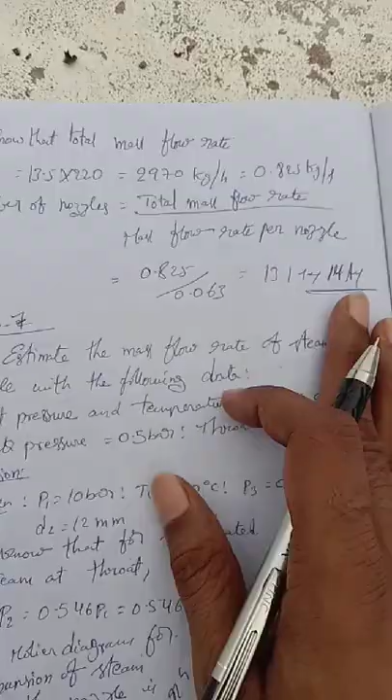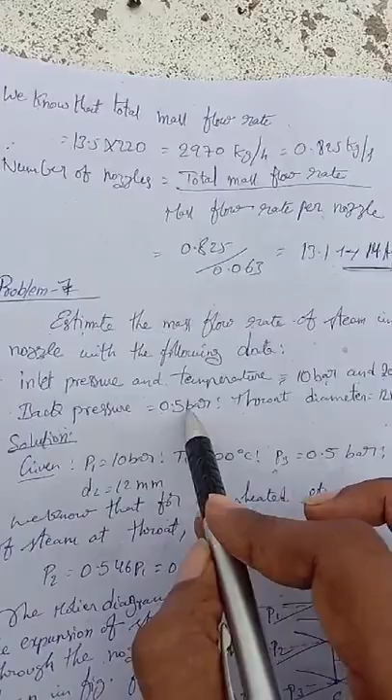We are going to continue with the next problem. Estimate the mass flow rate of steam in a nozzle with the following data. Inlet pressure and temperature are equal to 10 bar and 200 degrees Celsius. Back pressure is equal to 0.5 bar. Throat diameter is equal to 12 mm. So we are going to estimate the mass flow rate M. So now we are going to solve this problem.

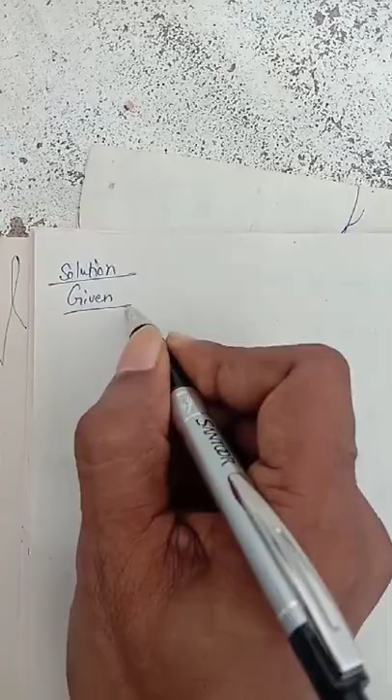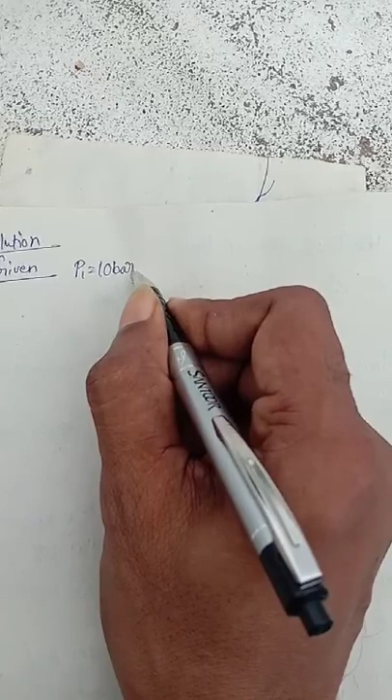Solution: given. So now what is the given data? You can write down here. P1 is equal to 10 bar. T1 is equal to 200 degrees Celsius. P3 is equal to 0.5 bar. And D2 is equal to 12 mm.

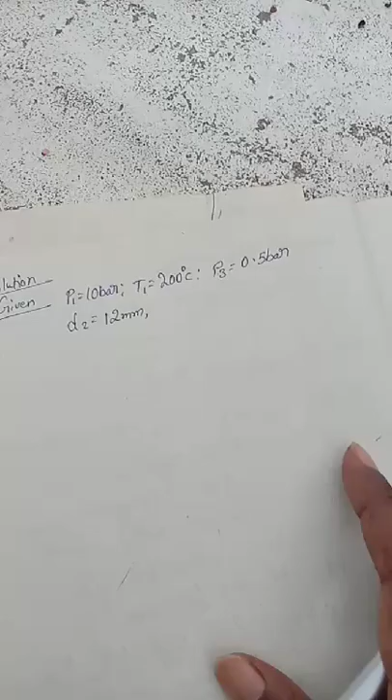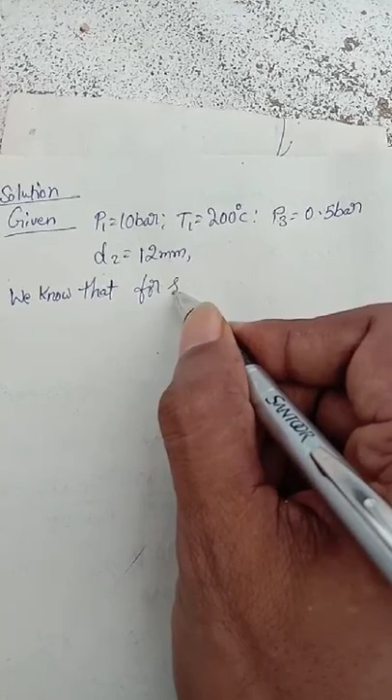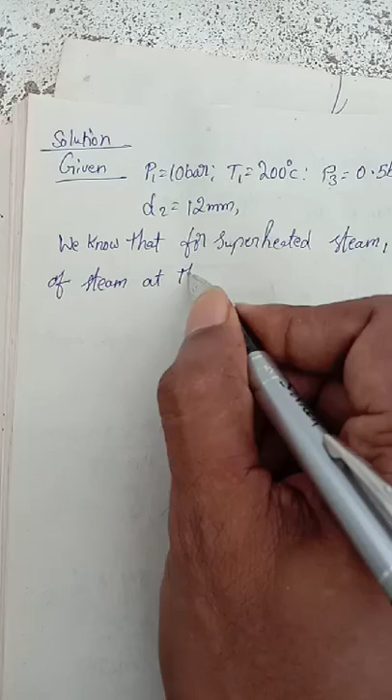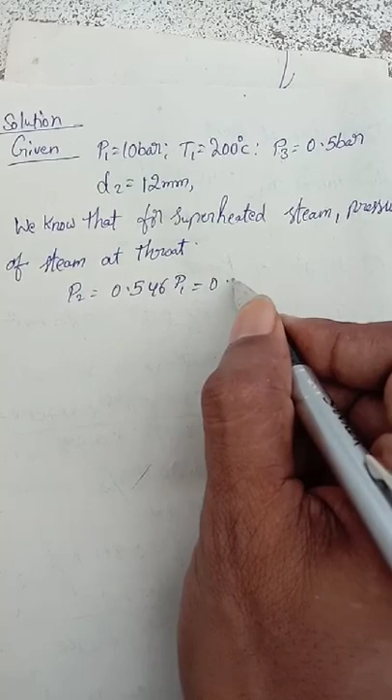Now we know that for superheated steam, pressure of steam at throat, P2 is equal to 0.546 P1. So 0.546 into P1, which is 10. Then you can write down here 5.46 bar.

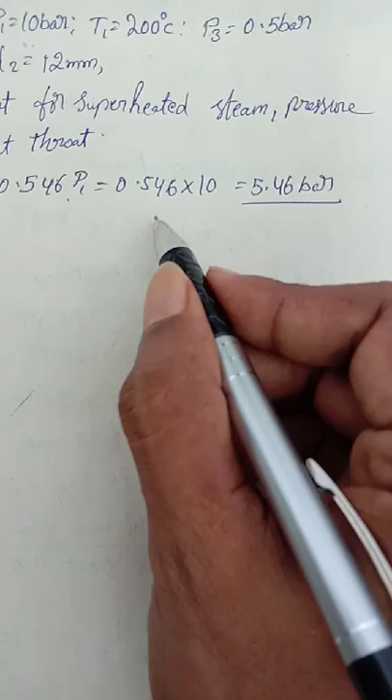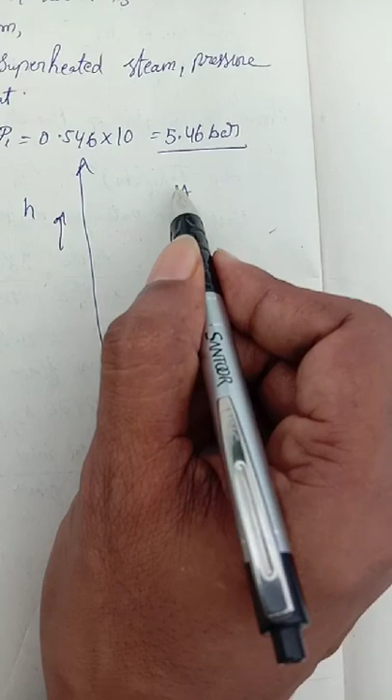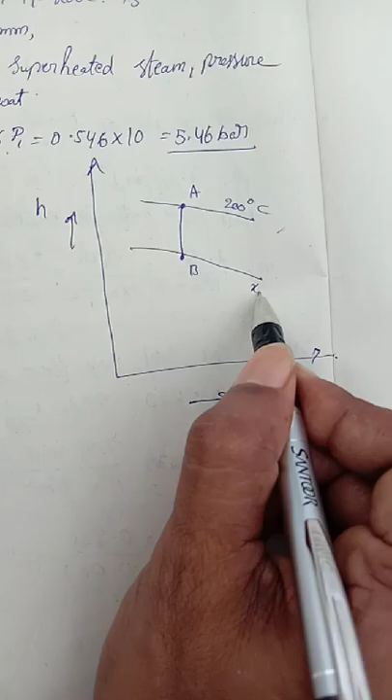Now we are going to draw here the Mollier chart. This axis is H, and this is S, entropy. Now the point is representing A. The point here is representing B. Then here also the temperature is going downwards like this. And this is for x2. You can write down here 0.982. This is taken from steam tables.

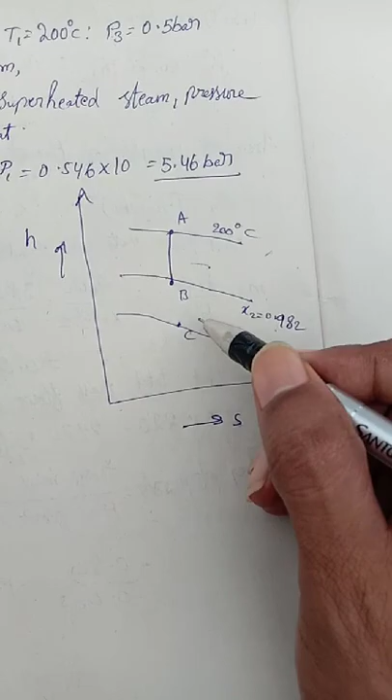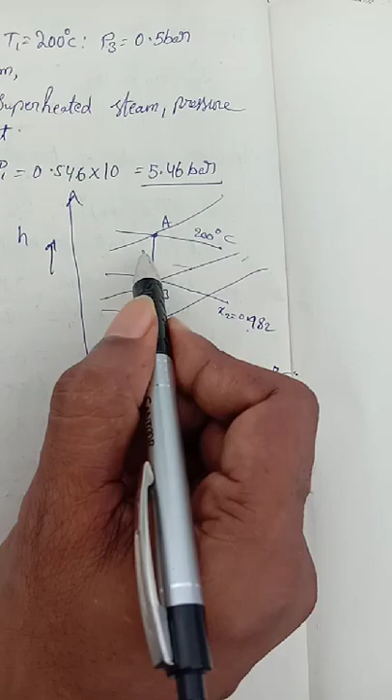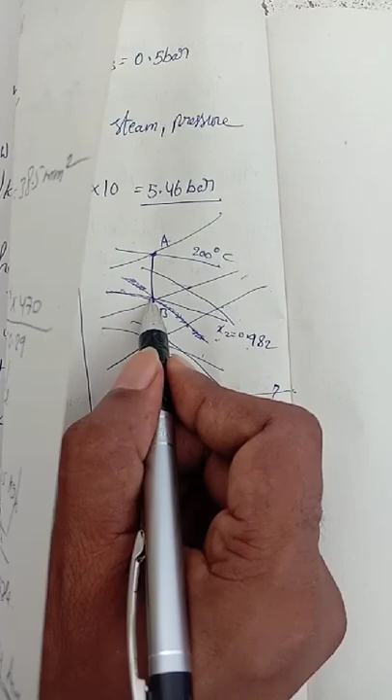Next we go for point C, exit. The exit is also going like this. Now the pressure lines. Now the saturation line, and this is also going like this. Already x2 is there, so we don't need to draw this line here. This is the saturation line.

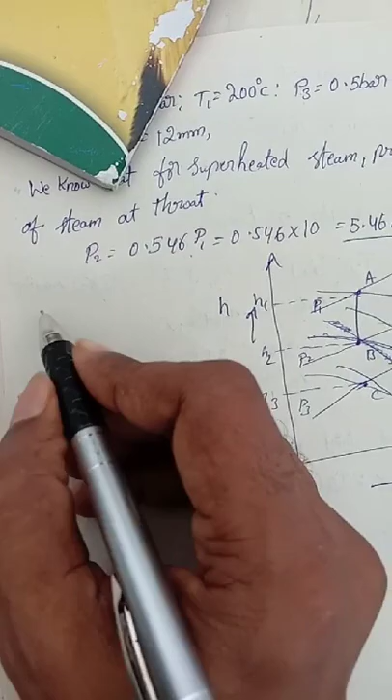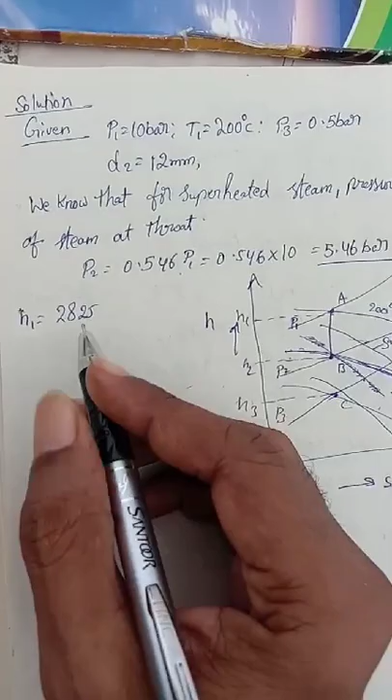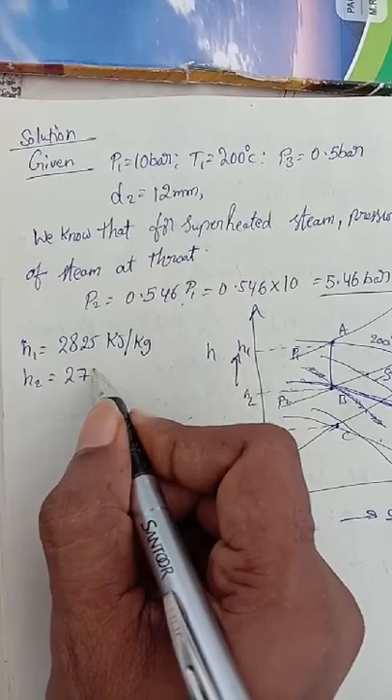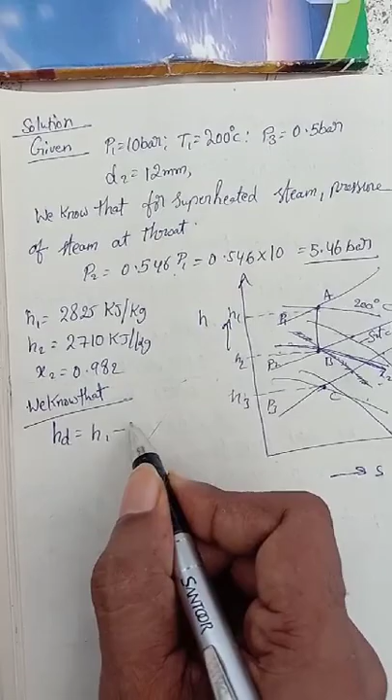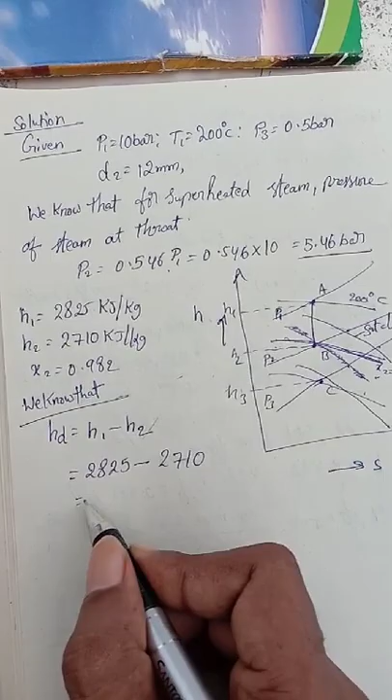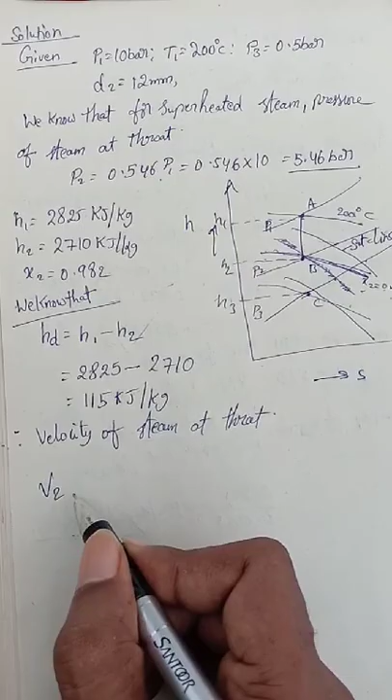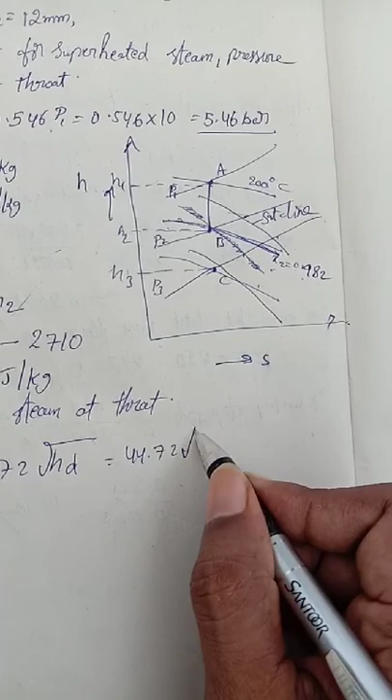We know that heat drop HD is equal to H1 minus H2. Calculate this and we'll get the heat drop. Therefore, velocity of steam at throat is equal to, you know very well this equation. Now substitute the values here, calculate this, and we'll get the answer.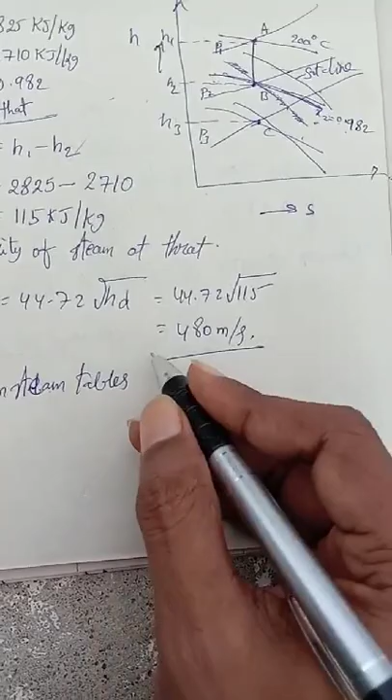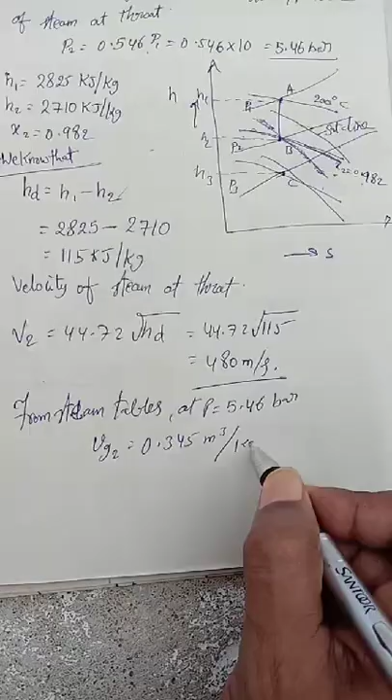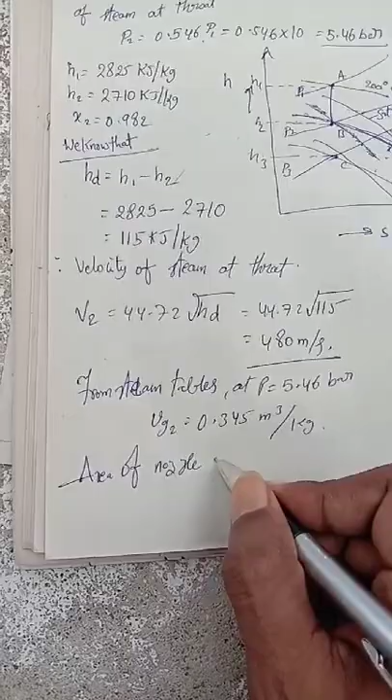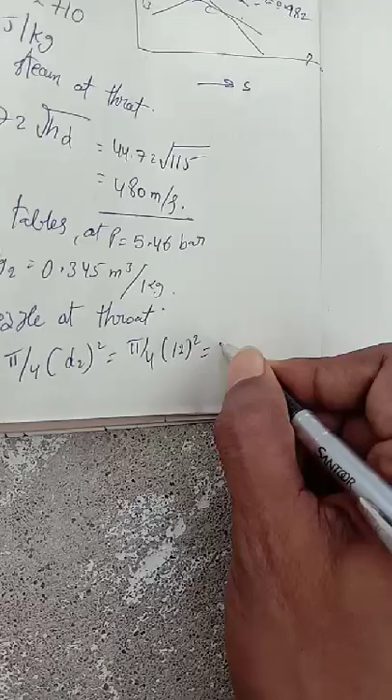Next, from steam tables, at pressure P equal to 5.46 bar, we find the specific volume at throat Vg2 is equal to 0.345 meter cube per kg. Now we find the area of the nozzle at throat. A2 is equal to pi by 4 d2 whole square. d is given, so solve this and we get the area. Converted into meters, 113 into 10 to the power of minus 6 meters square.

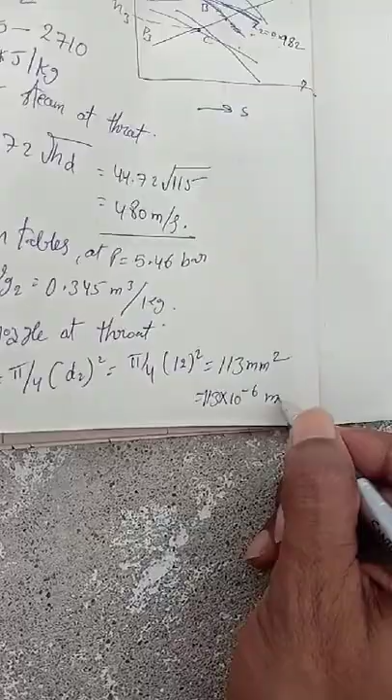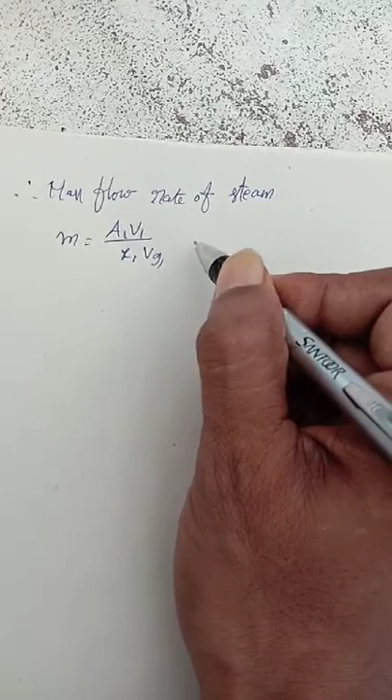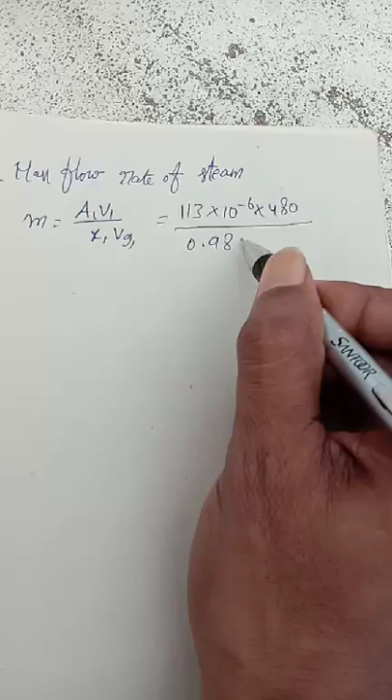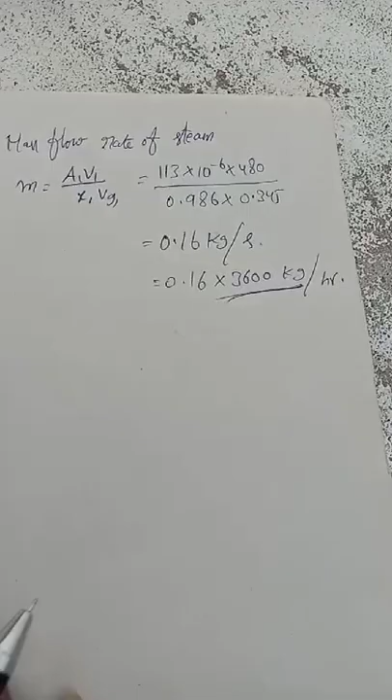Therefore, mass flow rate of steam, M is equal to A2 V2 divided by X2 Vg2, that is equal to 113 into 10 to the power of minus 6 into 480 divided by 0.986 into 0.345. Then solve this in kg per second. To convert into kg per hour, multiply by 3600. So this is the solution for this problem, to find the mass flow rate.

And next we go for another problem.

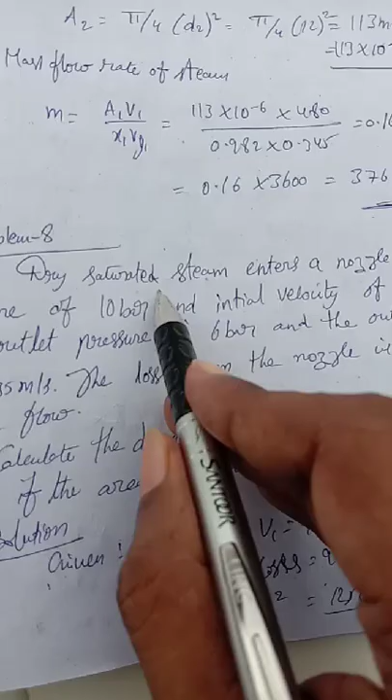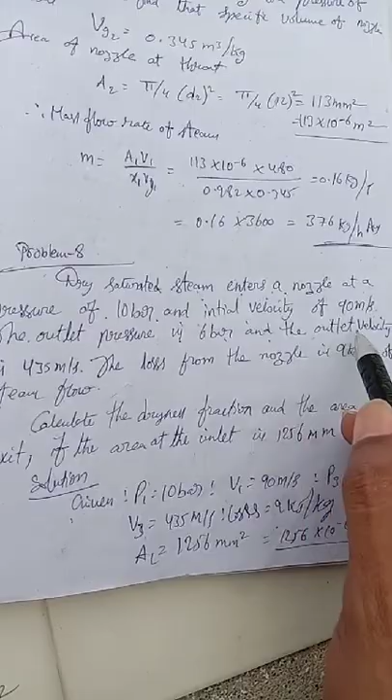Dry saturated steam enters a nozzle at a pressure of 10 bar and initial velocity of 90 meters per second. The outlet pressure is 6 bar and the outlet velocity is 435 meters per second. The losses from the nozzle are 9 kilojoules per kg of steam flow. Calculate the dryness fraction and the area of the exit if the area at the inlet is

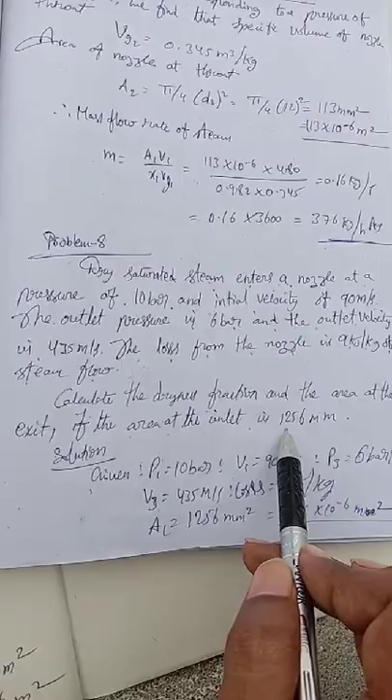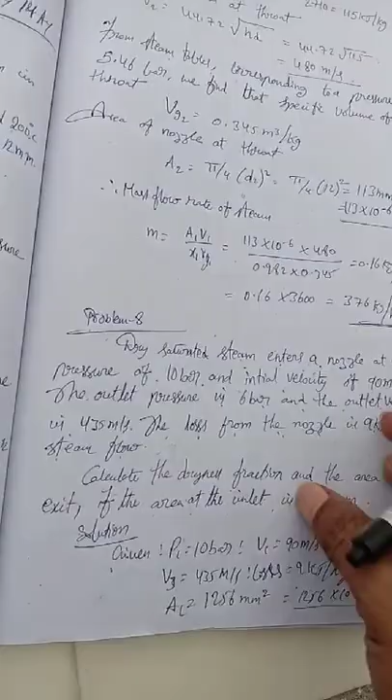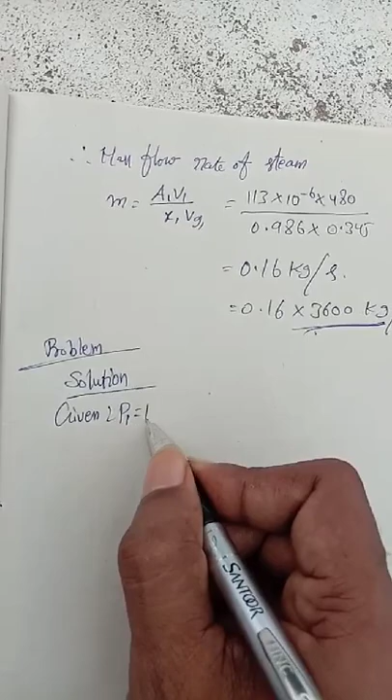So this is how the problem is here. We will see how to solve this one. Solution. Given, you can write down first the given. Here P1 is equal to 10 bar, V1 is equal to 90 meters per second.

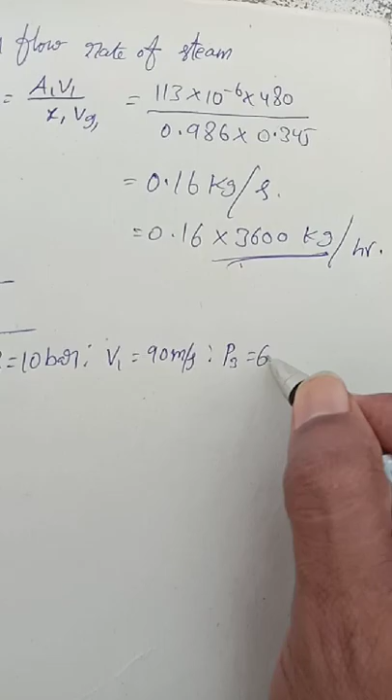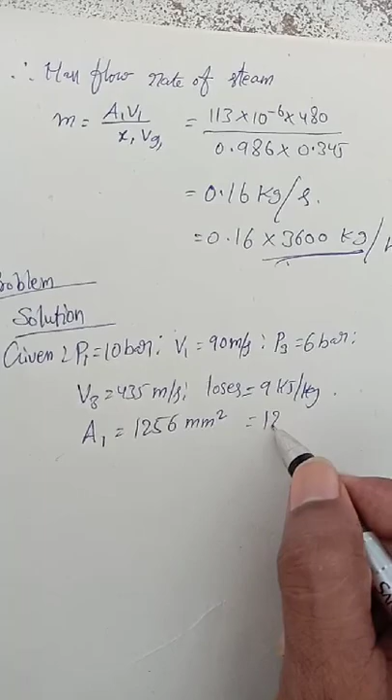P3 is equal to 6 bar. V3 is equal to 435 meters per second. Losses are equal to 9 kilojoules per kg. A1 is equal to 1256 mm square, which you can write as 1256 into 10 to the power of minus 6 meter square. So this is the given in the problem.

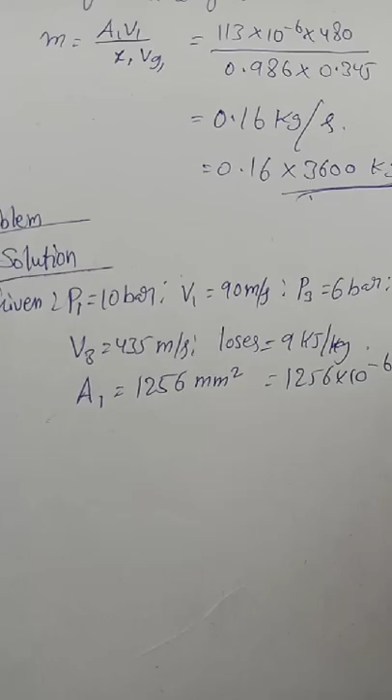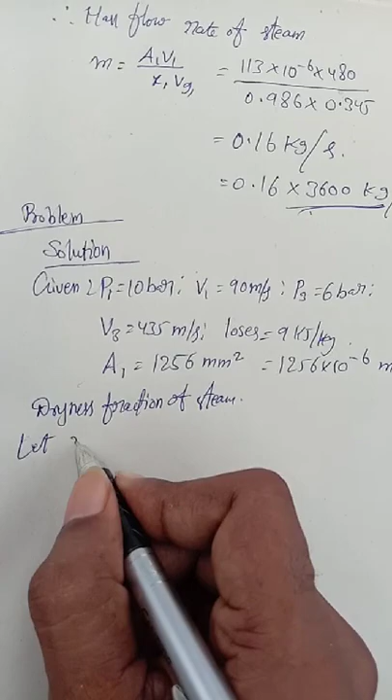Now we are going to find the dryness fraction of steam. So first, we find the dryness fraction of steam. Let x3 be the dryness fraction of steam at the exit. From steam tables,

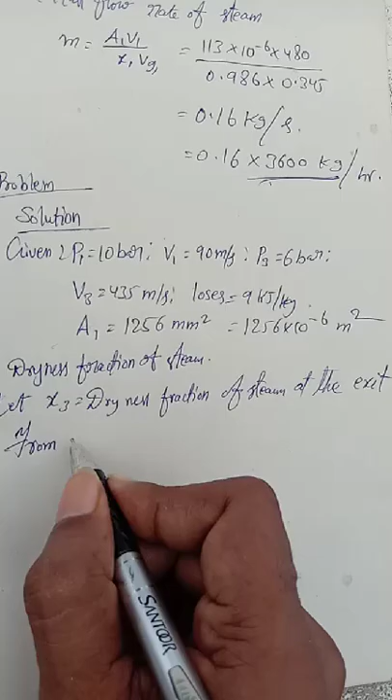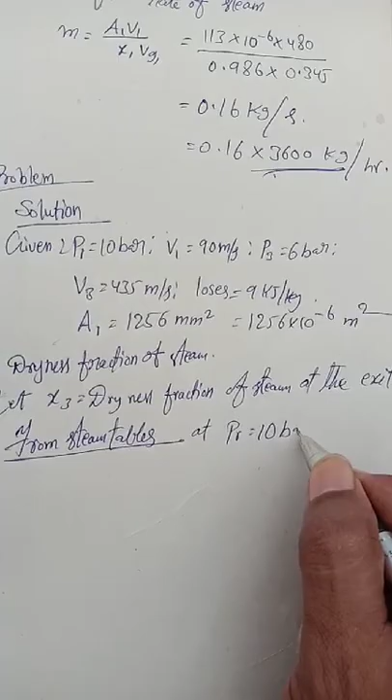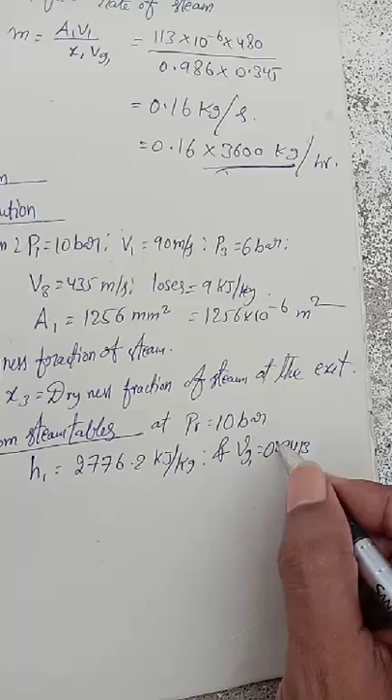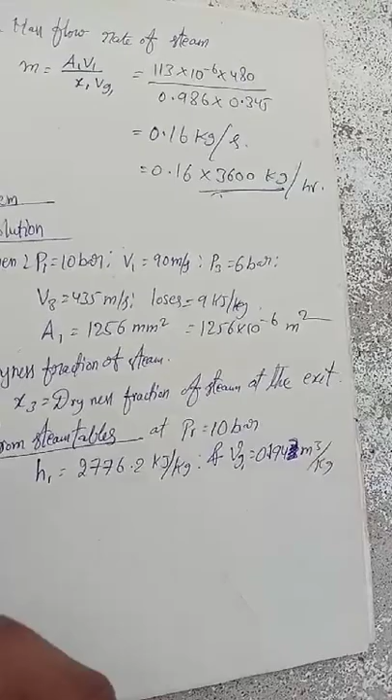at a pressure of 10 bar, we find the enthalpy of dry saturated steam, H1, and VG1 is equal to 0.1943 meter cube per kg. And corresponding to a pressure of 6 bar, at 6 bar we find

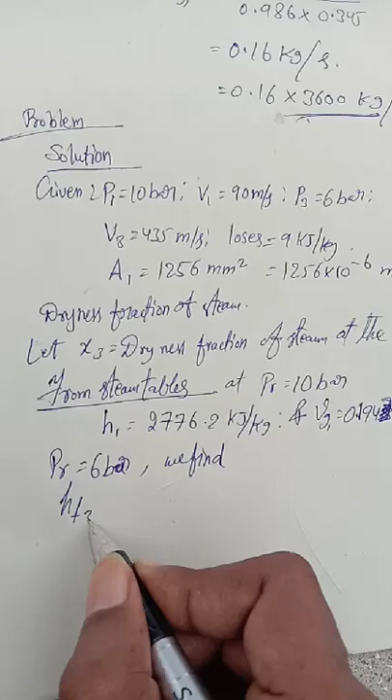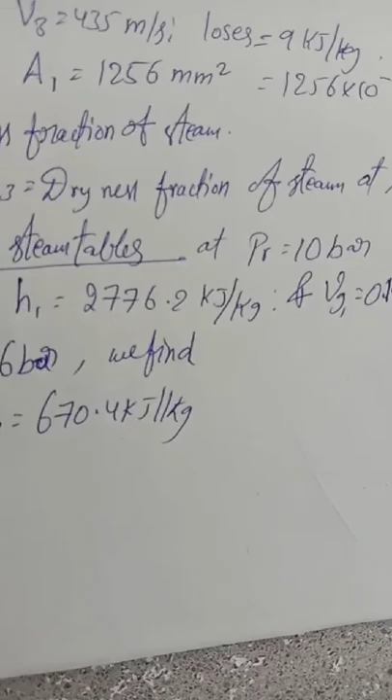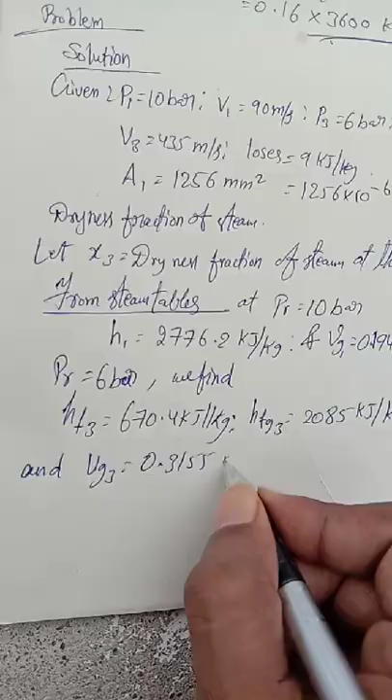HF3 is equal to 670 kilojoules per kg, HFG3 is equal to 2085 kilojoules per kg, and VG3 is equal to 0.3155 meter cube per kg.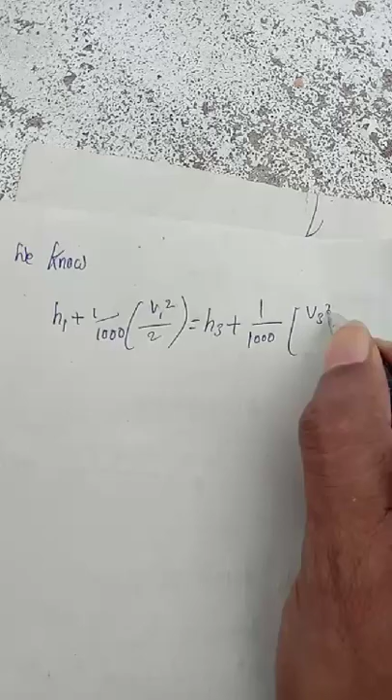Now we know that for a steady flow through the nozzle, H1 plus 1 by 1000 V1 squared by 2 is equal to H3 plus 1 by 1000 V3 squared by 2 plus losses. This is the steady flow equation

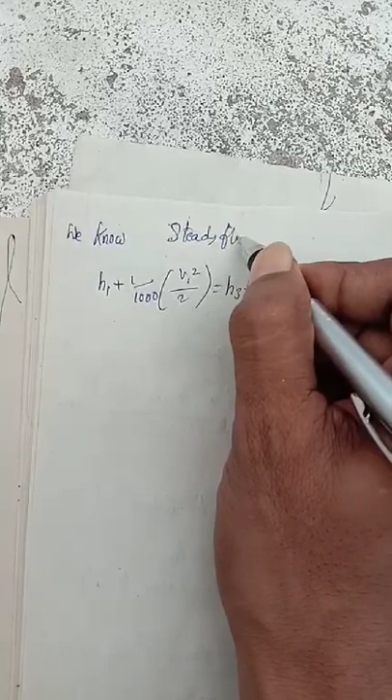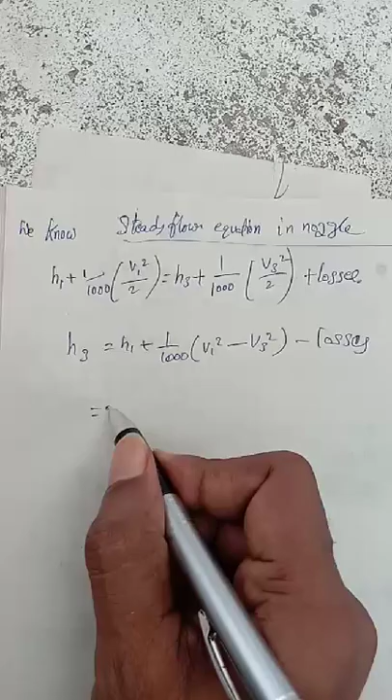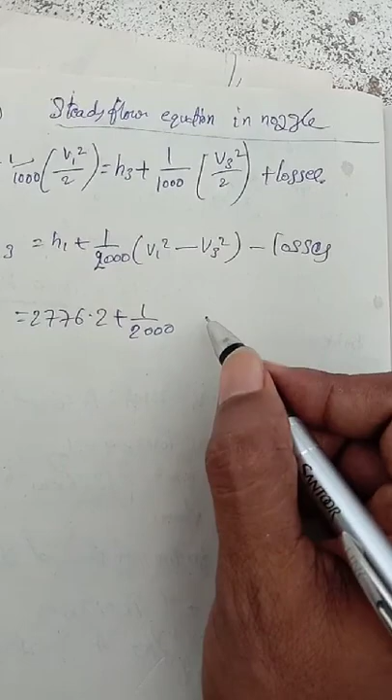in a nozzle. So then H3 is equal to H1 plus 1 by 2000 into V1 square minus V3 square, minus losses. Then substitute the values. This is 2000, I think. Minus 9, losses is given. So 2776.2 minus 99.6. Calculate this and we'll get the answer in kilojoules per kg.

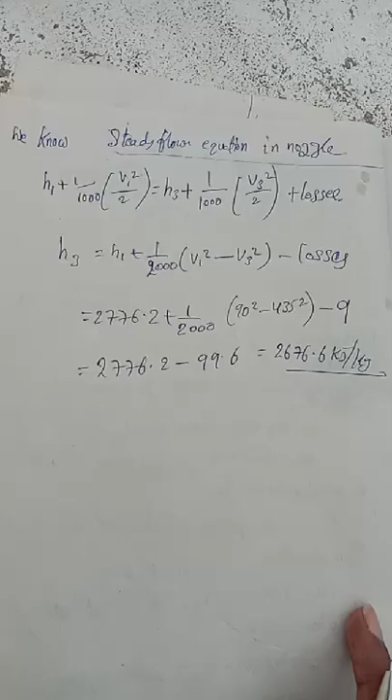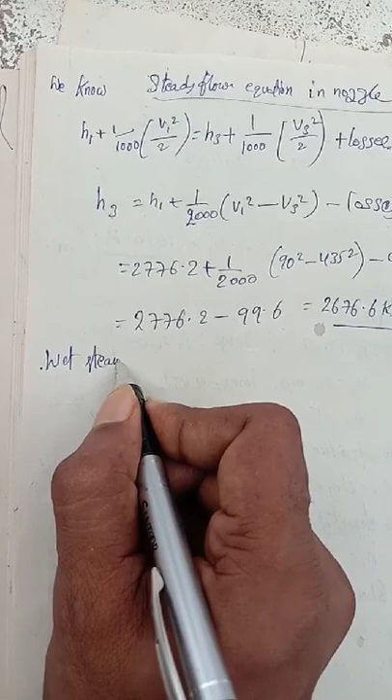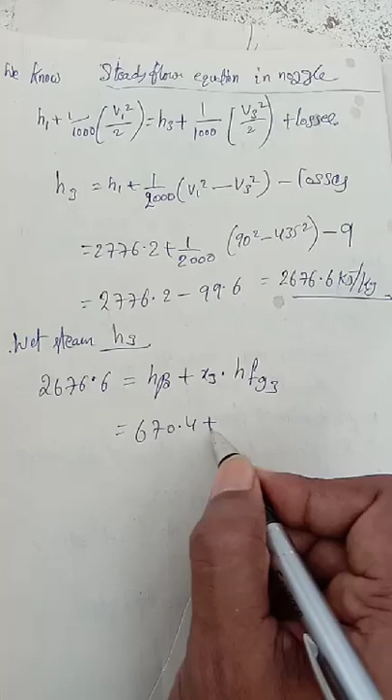Now we also know the enthalpy of wet steam H3. So 2676.6, that is H3, is equal to HF3 plus x3 HFG3. Now substitute the values and we will get the dryness fraction at the exit. Therefore x3 is found.

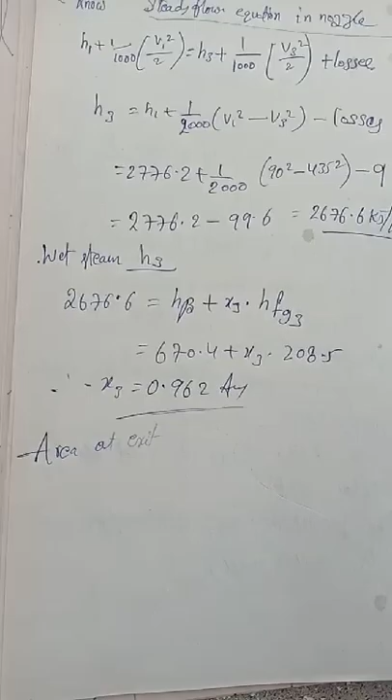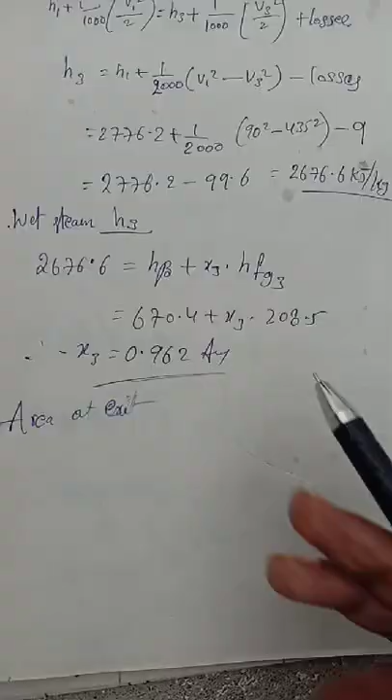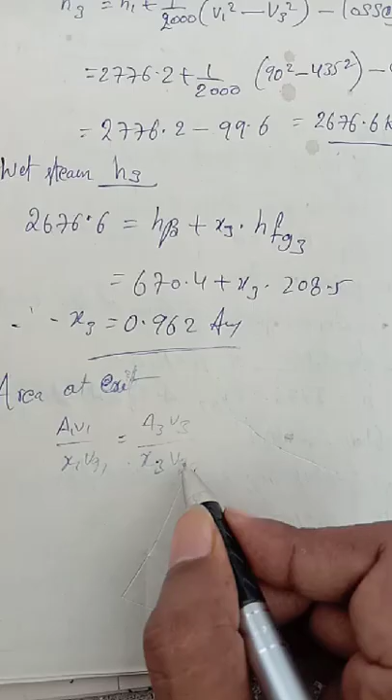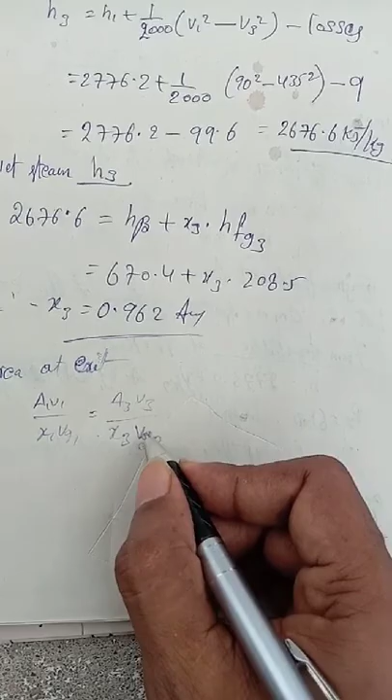Now we go for the area at the exit. We know the equation A1 V1 divided by x1 VG1 is equal to A3 V3 divided by x3 VG3. The pointer is not working, but anyhow, we'll solve this. Substitute in this equation and we will get A3.

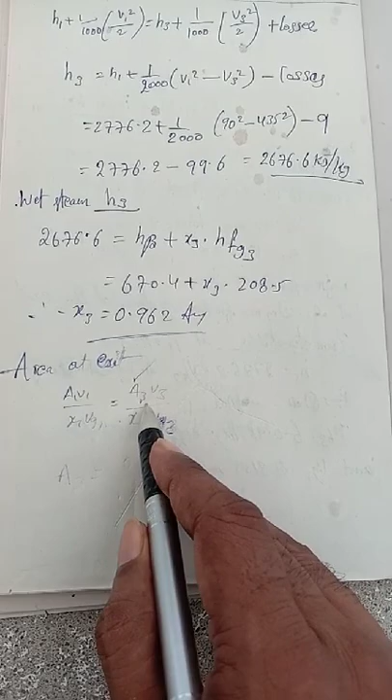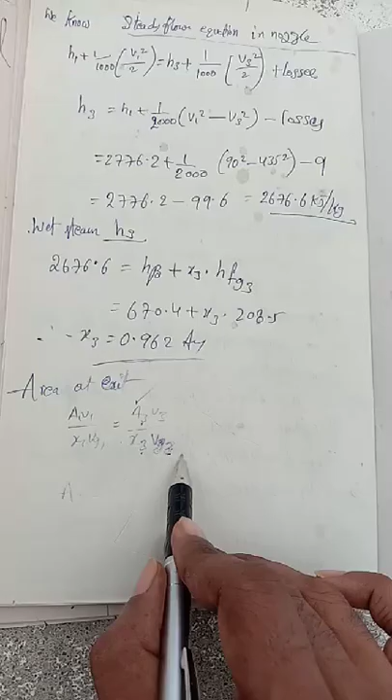These are all values we know. A1 we know, V1 we know, x1 is given, VG1 we took from steam tables. A3 we don't know, so we are going to find A3. V3 we know, x3 we found, and VG3 we took from steam tables. So all values are known except A3, so we can substitute and calculate, and we will get the final area at the exit of the nozzle.

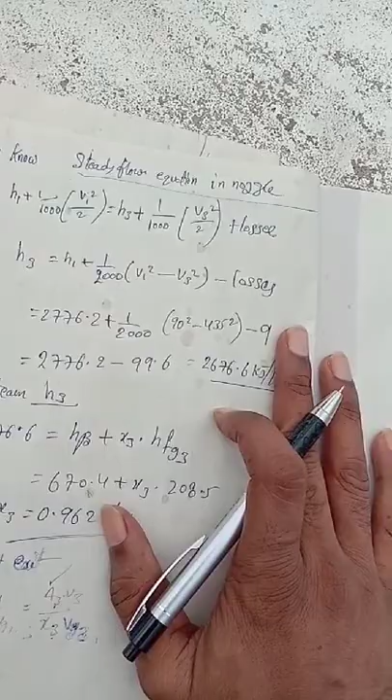We have completed steam nozzles. From next class onwards we are going to learn about steam turbines.